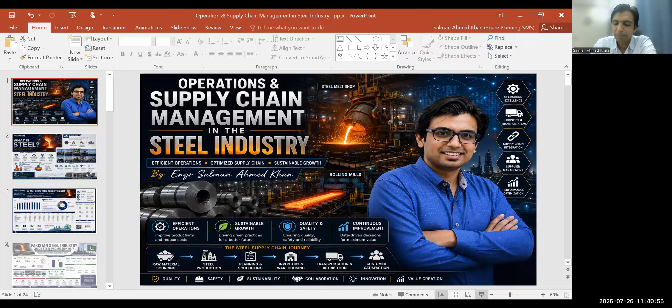Before I start talking about operations and supply chain management in the steel industry, it is also very important to know the basic definition of steel. According to the World Steel Association, steel is an alloy of iron and carbon, containing less than 2% carbon and less than 1% manganese.

The World Steel Association is basically an association associated with different countries and their steel industries. This association gathers data based on production of different companies situated in different countries. They gather data based on production, technologies, usage of raw materials and consumption, health and safety management, quality management, and they also talk about technology innovations.

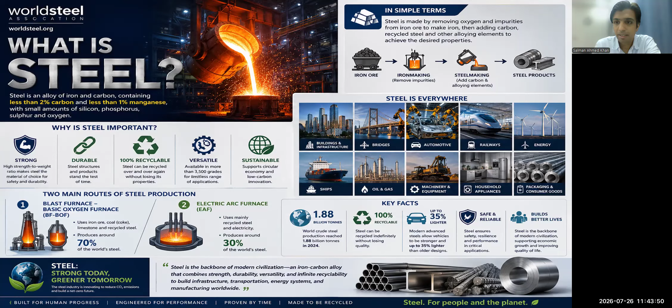It plays an important role in the economy and is everywhere around the world, whether in building infrastructure, bridges, automotive, railways, energy, households, machines and equipment, oil and gas, or ships. All these sectors contain steel.

If we talk about annual steel production, based on data from the World Steel Association, China is number one, leading in producing more crude steel than any other country. Then India, Japan, United States, Russia, South Korea, Germany, Brazil, Turkey, Iran, and so on.

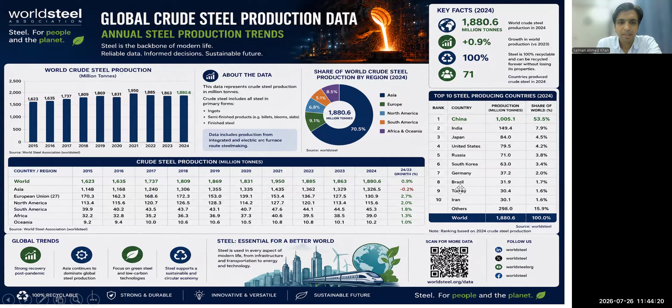If I talk about the role of the steel industry in Pakistan, according to data from the Pakistan Association of Large Steel Producers, the steel industry contributes 0.7% of Pakistan's GDP. It produces 9 to 10 million tons of steel annually, including products related to rebars, coils, wire rods, channels, etc.

It represents 3.5% of the large scale manufacturing index and generates 300 billion in revenue, including taxation duties, incomes, and other things.

It has provided employment to hundreds of thousands of people, either in the form of skilled laborers, electricians, plumbers, fitters, laborers, melters, casters, etc.

So this industry is also playing a key role, and the major players here are Amreli Steel, Aisha Steel, FF Steel, Mughal Steel, Naveena Steel, and Sheikho Steel.

Before starting my presentation on my actual topic, we can say that steel is a major contributor to any country's economy. When you have a stronger steel industry, when you have more steel industries, or you're producing more steel in any country, it means your economy is much stronger.

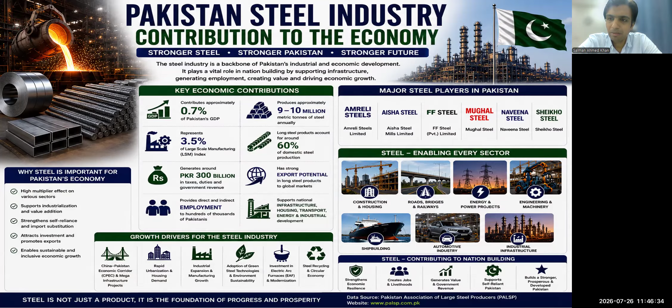Later on, that steel will play a pivotal role in housing construction, road, railway, bridges, engineering and machineries, automotive industries, shipbuilding, etc. So it means that the steel industry is a backbone of any country's economy, and even for Pakistan it is also very important.

So now coming to my actual topic of supply chain management. When we talk about supply chain management, this is basically the structure.

It contains planning. When I talk about planning, it contains the supply chain design, demand planning, need assessments, and determining specification. In planning, we do sales and operations planning, and production planning based upon the sales and marketing data we received.

When we do production planning, we plan for the raw material, equipment and machineries, spares. We plan for the operational and consumable spares accordingly in order to have a smooth production.

Then we determine the specification of each raw material, equipment, spare parts, and then set their inventory data in terms of consumption patterns, forecast patterns, etc.

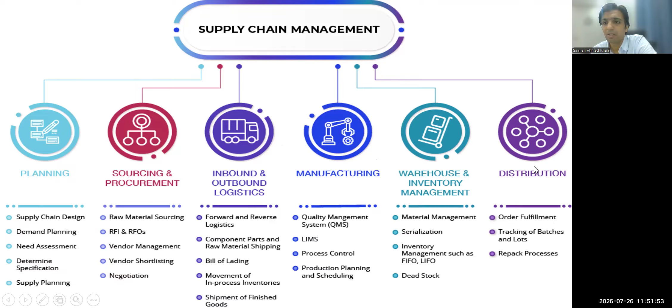So now I was initially talking about the supply chain in the steel industry. So this is the overall summary of the supply chain in the steel industry. You do the raw material sourcing of iron ore, coke, coals, limestone, scrap, ferroalloys, and then you manage its inbound logistic transportation, which contains receiving and inspection, raw material handling, storage, etc.

After that, when you receive that raw material, you do its manufacturing in terms of melting through either blast furnace or electric arc furnace. It depends. Here in this slide I have only mentioned the technology of the blast furnace, although you can also make the steel through the electric arc furnace. This will be explained later in this slide as well.

After that, when you make that product in between and after manufacturing, when your product is work in progress inventory, you also check its quality control. After the product is finished, you do the same things, and then you actually dispatch it in the market. So these are the products I was talking about earlier: iron rebars, wire rods, steel coils, steel sheets, steel pipes, and shafts and structural sections based upon industrial requirements.

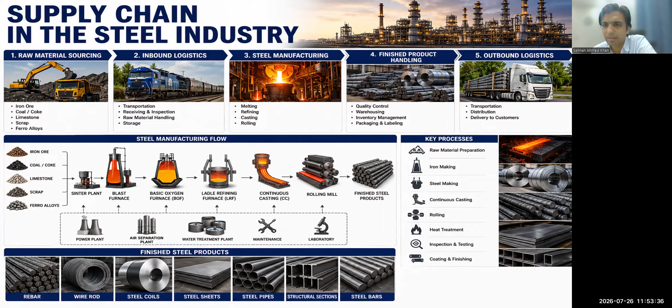So the first major thing here is the raw materials in the steel industry. This is a very robust supply chain of raw material, refractories, and scrap, which ensures uninterrupted steel production with quality, cost efficiency, and sustainability. I already talked about the raw materials: iron ore, limestone, coals, and scrap.

But what are the refractories? This is a new word here. Refractories are also important for manufacturing steel, and they matter a lot when you want to produce high quality steel. Right refractory selection and management improves furnace life and safety, because while producing steel, it's also very important to ensure health, safety, and the environment. So refractory plays an important role in your manufacturing technology.

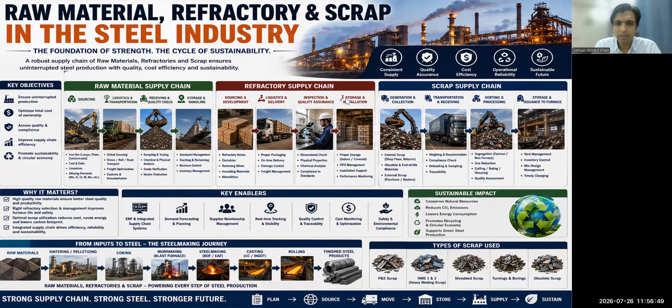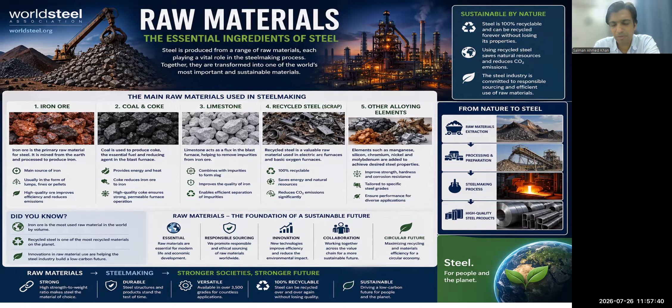I was talking about the raw materials in the steel industry. I already talked about this in detail. This slide is according to the World Steel Association data that specifies the raw materials used in steel making. We use iron ore, coke coal, limestone, and recycled steel, along with other alloying elements such as manganese, silicon, chromium, nickel, and molybdenum, which are added while manufacturing steel to get the desired composition. Every composition is different based on the product you want to achieve.

Manufacturing and processing cost is the third highest cost. The key inclusions here are costs related to melting, refining, casting, rolling mill operations, and heat treatments. Other costs could be related to consumables, maintenance, labor cost, logistics and supply chain cost, quality inspection cost, financial costs and overheads.

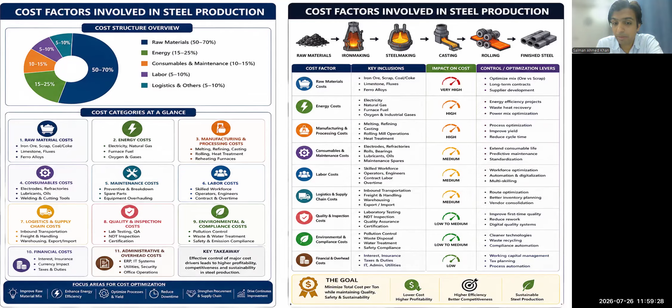So overall, the raw material cost is higher. After that comes the energy cost, the supply chain cost, the consumable and maintenance cost, and the labor cost and logistics. These are the cost factors involved in the manufacturing of the steel industry. So while producing steel, our goal should be to minimize the cost per ton while maintaining quality, safety, and sustainability.

Now we talk about the procurement process in the steel industry. The procurement scope is very versatile and robust in the steel industry. The key objectives of procurement here are to ensure production with timely availability of material, optimize the total cost of ownership, ensure quality and compliance, build strategic partnerships with suppliers in order to reduce procurement risk, and make sure to deliver the product with the 5 R's, which I already mentioned in my previous slide.

Procurement scope is very vast in the steel industry. You do the procurement of raw material, scrap, refractories, ferroalloys, consumables, electrode fluxes, chemicals and gases, wear parts and spares.

When I talk about rolling, you do rolling mill spares procurement of bearings, couplings, reheating furnace burners, refractory hydraulic oil, lubricants, electrical instrumentation, motor drives, PLC. It's a huge chunk of procurement in the steel industry.

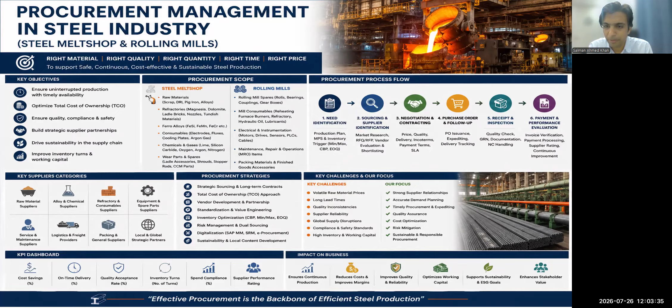Now, the material planning side, which is actually my side, also in the steel industry. Materials planning is about planning for the raw material, planning for the consumables and the refractories, casting material planning, like planning of the mold powders, copper molds, tundish nozzles, stopper rods, cooling water control related spares like flow meters, nozzles, etc.

You do the planning of the utilities and the general item planning. If I talk about the utilities, it means you have to plan for the oxygen, nitrogen, the other gases. You need to do planning for the power, water, fuel, lubricants, and the oil required for running the melt shop.

And similarly, if you are working in the rolling mill side, you do the planning based on the billet receiving, based on the production schedule. You do the different size planning, you set the capacity planning, and you do the consumable spare part planning of the rolling mills, especially planning of the rollers, bearings, lubricants, utilities, etc.

So its key objective is to ensure uninterrupted production, maintain optimal inventory, accurate demand planning, timely procurement and availability of the raw material.

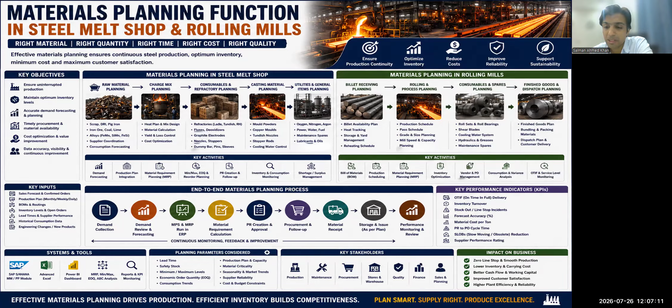While you're working in material planning, you have to work cross-functional with all departments - production, maintenance, procurement, store and warehouse, quality, finance, and sales planning - in order to ensure optimal order planning. Basically, you are the epicenter of the entire supply chain.

Being a material planner, you have to do demand analysis, planning and forecasting, prepare material requirement plan, forecast future need, MRP processing, procurement coordination for purchase requisition, follow up with procurement, expedite order for timely delivery. Inventory management is also very important to monitor inventory levels, ensure optimum stocks, control inventory cost.

And then you also have to maintain supplier management with the OEMs, with those suppliers who are directly responsible for your equipment repairing. You also expedite and follow up, track order status, follow up on deliveries. So this cross-functional coordination actually defines the role of the material planner to optimize order planning.

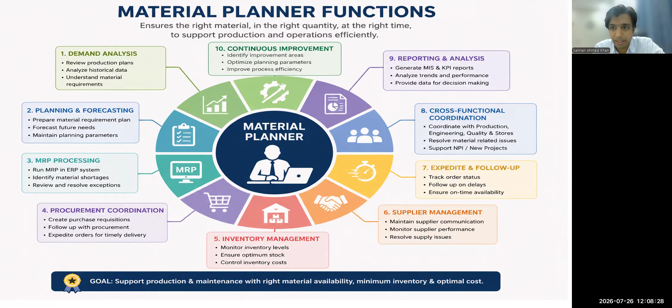And the last thing is to generate the reporting and do the analysis of all those things to provide data for decision making. The data is very much important in materials planning because based on the data, you actually do the planning.

Now, inventory management is also important in the steel industry. While you're doing inventory management of the steel melt shop, the rolling mills contain induction furnace spares, coil capacitors, IGBT, refractory materials, ladle, tundish, furnace, ramming, CCM spares, mold, copper plates, hydraulic, pneumatic equipments, mechanical.

There is a big engineering spares in the steel industry. Similarly, in the rolling mills, you do the planning of the gearboxes, the rollers, the couplers, the lubricants, crane, hoist and spares, etc. This is a very big chunk of spares in the steel industry, and I try to mention the complete spares categories in this slide and the previous one, so viewers can understand how complex the supply chain and operation management is in the steel industry, and how vast and robust this supply chain is.

And while you are doing inventory classification, you can apply Pareto analysis, or we can say ABC analysis, where you classify based upon high values, medium values, low values. Or if I talk about the inverse of this inventory classification, you can do inventory planning based upon consumption, based upon the 80-20 rule. And after that, you can also determine your key performance indicators.

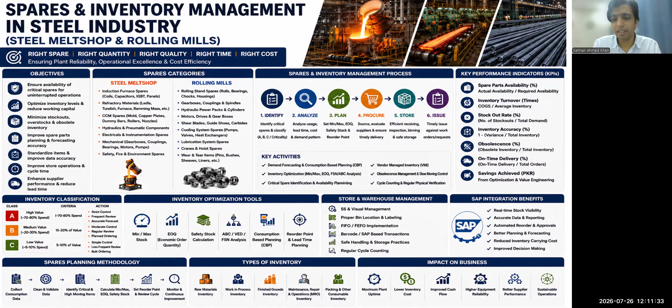Now, this is the manufacturing in the steel industry, which I already mentioned about. According to the data mentioned earlier in my slide, according to the world steel industry, currently many companies are producing steel through three technologies.

Number one is the blast furnace, number two is the electric arc furnace, and number three is the induction furnace. Blast furnace technologies use the key inputs scrap, iron ore, coke, limestone, as I already told you earlier in my slides.

The electric arc furnace uses scrap, and while using the electric arc furnace, you also have to pass the steel through the ladle refining furnace technology as well. And similarly, in the induction furnace, you also have to do the same thing.

The major input is the scrap, and you also add some ferroalloys and do the casting to produce the finished products in the form of billets. And then after that, you do the rolling based upon your product requirement.

So in manufacturing management, you have to do the production planning and control. You have to focus on the process and the quality management. You have to focus on the maintenance management, preventive and predictive maintenance, and the supply chain and material management.

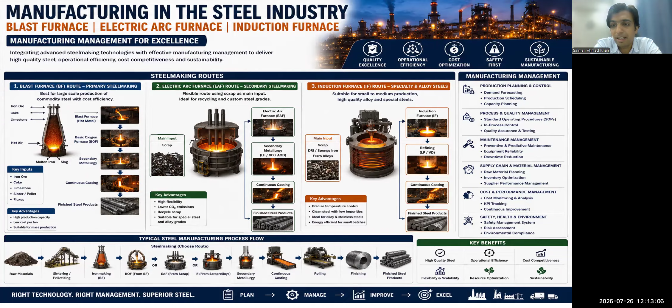Now, quality management is also very important, as I already talked about. The quality management in steel plays a very critical role here. Quality management talks about the raw material inspection. They do the physical inspection of the raw material, especially the scrap.

They check the size, the supplier quality ratings, and do the chemical analysis. They check the charge mix control, temperature control, tap weight control, slag, or you can say they check the chemical composition and also check the billet quality of the billets.

And after that, billet receiving inspection is done, it is passed through the reheating furnace in the rolling. The rolling is also done and it does the thermal treatment. And then it checks the final finished product. So this is the role of the quality management here.

Quality management makes sure there is zero defect and ensures production should be based upon the ISO standards, and the key performance indicators are zero rejection rates, less than 1%, on-time delivery and the process capability, and the customer satisfaction.

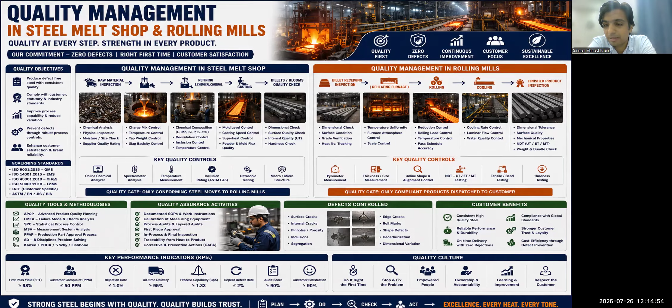So this is the role of quality in the steel melt shop and the rolling mill. The key quality controls are online chemical analyzers. They do the spectral analysis. They also measure the temperature. Ultrasonic testing is also being done, and hardness testing is also being done. Tensile strength testing is done in the rolling mill section.

Warehouse management actually receives that product and performs the quality inspection with the coordination of the end user. They put away, they store that on the bins, and either that could be the plant equipment spares machinery or could be the final finished product as well. And they make sure that there should also be the packing over there as well.

So when we talk about automation of warehouse management, right now in the steel industry, as far as I know, based upon my experience and expertise, what automation I have seen so far and have worked in is that we have actually seen the warehouse management module, which talks about the bin locations, which defines the bin locations, their addresses, so that whenever there is a requirement of any material, you don't have to look around every bin to issue the material.

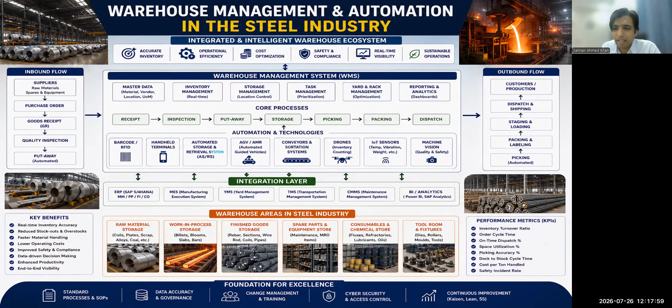Logistics also play a very critical role in the steel industry, as I already mentioned. Efficient logistics and transportation ensure the right steel product in the right quantity, to the right place, at the right time, and the right cost. So this is the benefit to the steel industry.

Logistics play a very key role in material sourcing, inbound logistics, in terms of handling the logistics. They actually do outbound logistics planning as well, in terms of transportation planning to different customers, route optimization, route planning, etc.

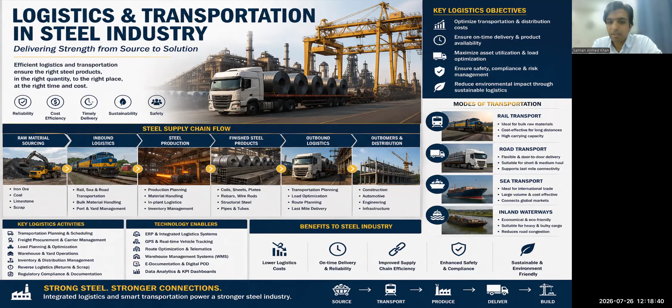Now, sales and marketing is also very important. While you are producing the steel, it is also very important to do the sales of the product, the marketing of the product, in order to get good revenue for the steel. Sales and marketing functions have to identify market trends, demand patterns, pricing, and new opportunities. They have to build customer relationships and understand customer requirements and needs.

They also must understand product portfolio management well. I mean, they should be aware of the right steel grade, size, and product functions. They must also do pricing and contract management with competitive customers. Brand building and promotion is also very important. So these are the functions of the sales and marketing department in the steel industry.

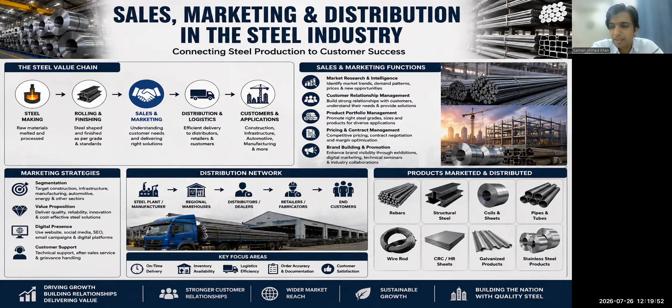So product marketing and distribution could involve rebars, steel wire rod, galvanized products, stainless steel products, structural steels, etc.

While I talked about this supply chain, the role of ERP here is very important, because when you are dealing with a lot of data, it is important that you have digital operations and supply chain management systems in your company. So SAP plays a very good role in all this.

I mentioned material management only because it is my area. There is also a financial management module as well, and there is also project management, and a plant maintenance module as well in SAP.

So SAP actually talks about the master data foundation. It contains centralized master material data, vendor master data, info records, and we can also get procurement management data in terms of PR, request for quotations, purchase orders, inventory management, stock management, invoice verification, payments, reporting, and analytics. So all these things can also be done through SAP.

So SAP also has different integrated modules. As I mentioned, it contains modules for production planning, sales and distribution, financial accounting, quality management, plant maintenance, and warehouse management as well. So if any steel industry doesn't have these tools and techniques, their operations could be very complex. In order to make sure things go end to end, these modules should be part of your operations.